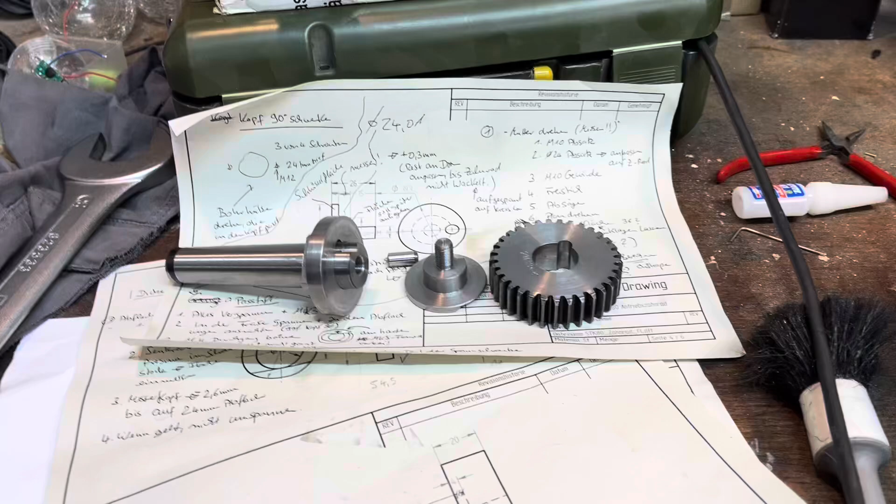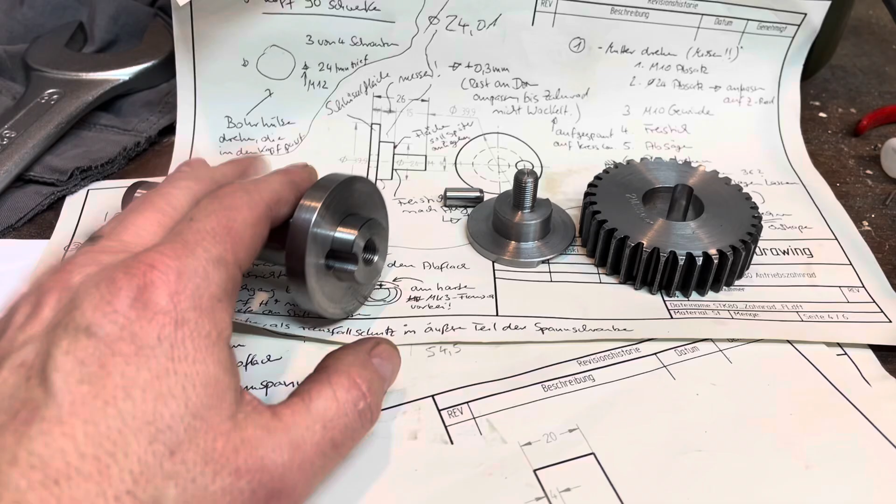All right, we're looking at the drive gear and the shaft of a slotting head for a Steinel SH4. So this piece there. I bought the slotting head without the drive dog here, or the drive gear.

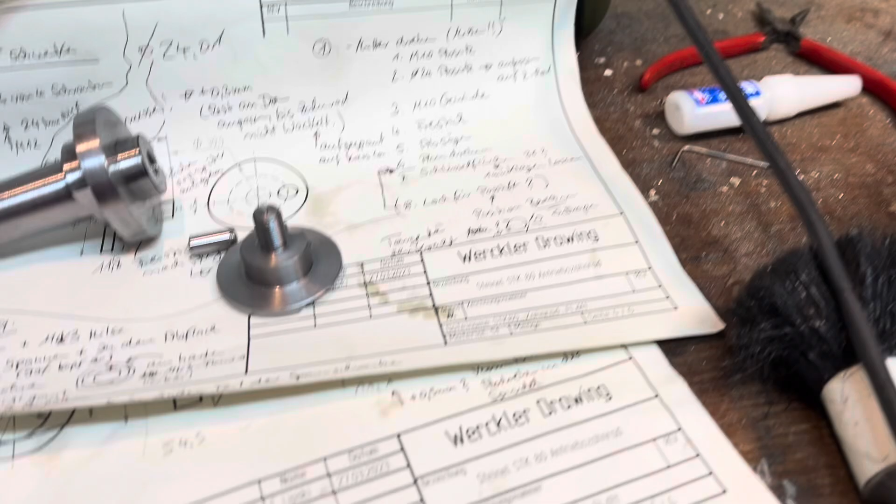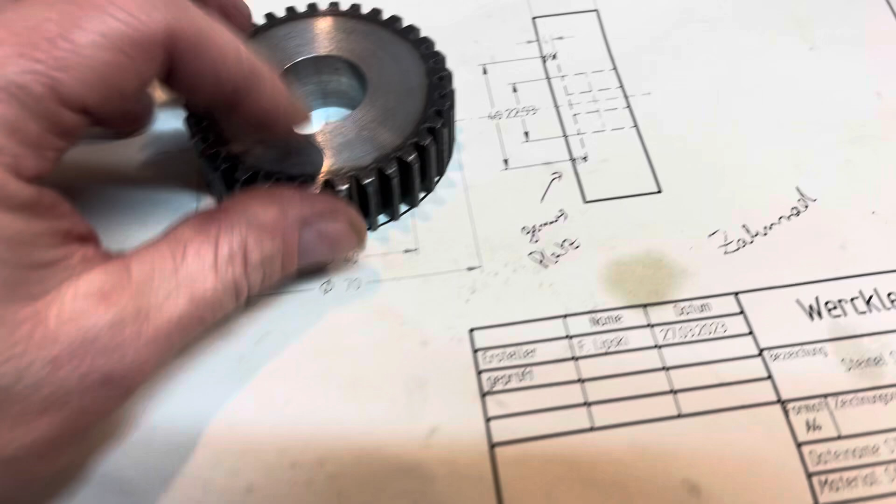It turns out that other than for the vertical head, this here is a standard gear that is, let me see, I guess, module 2 and, I don't know, diameter 70, so you can easily find out. That is a standard gear. There it is. 33. Module 2, 33. This I bought. The original is 18. This is 20, but it doesn't matter.

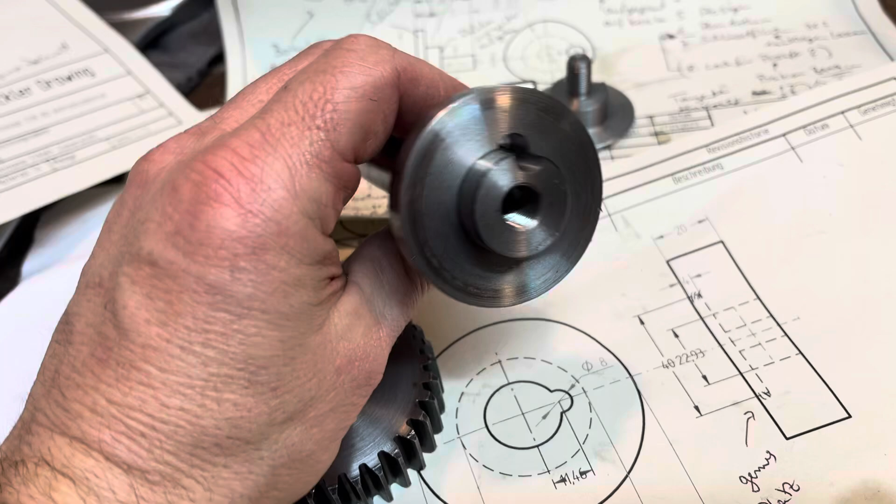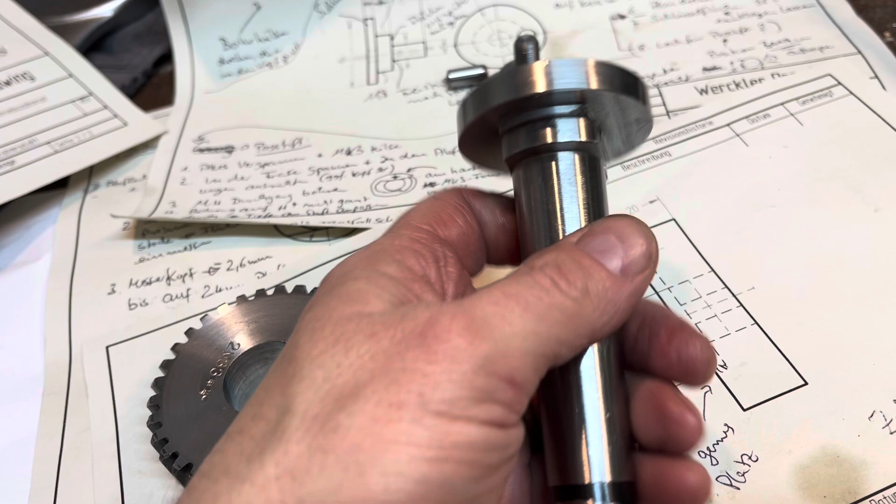The question was how to build an arbor and also how to make the connection between the gear and the shaft without a slotting head. So what I did is I bought a standard MK3 shank and I milled off these flats here with a carbide end mill. Then I turned this disc here that sits on here, which is then just glued on for further working on it in the shop.

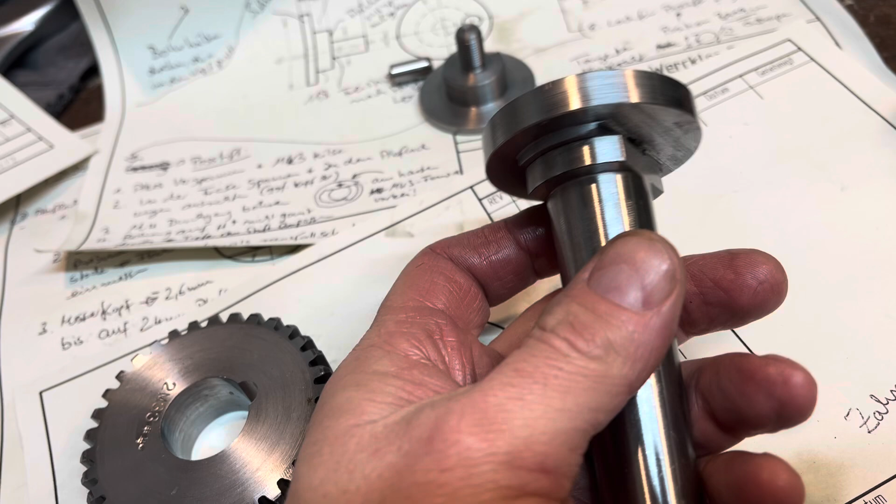Unfortunately, the first time I glued it not so good, so the attempt to also mill off the small flats here to have enough room to go into the spindle worked not so well, so it looks ugly, but it still works. What I then did is I built a nut like this. At the beginning it didn't have this hole in there, and this nut screws in here and forms a more or less continuous shaft to give rigidity to the whole thing.

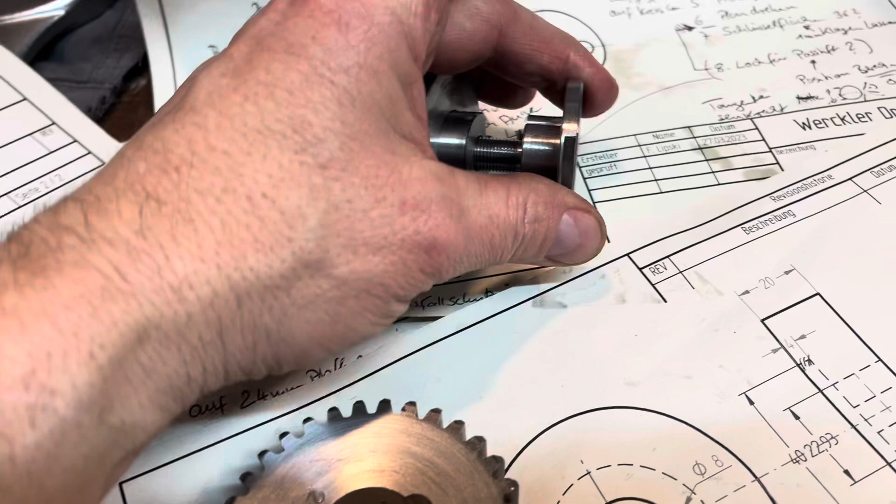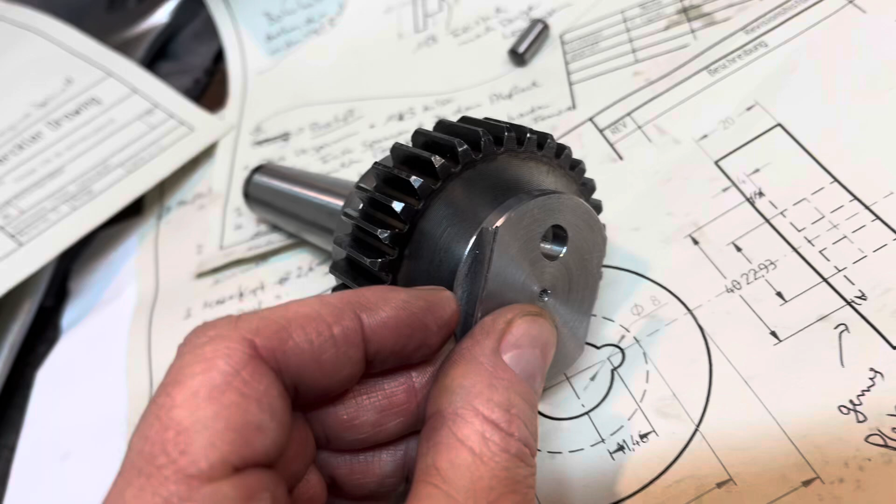And there are two flats here that also went not perfectly this time. Nevertheless, it's a 36 key that you can put on there. And then I screwed it all together and put it into my mill. And I put a little wire here in between the nut and the face, so that I can screw it tight, but at the end, after having drilled the hole, the nut would turn another half turn. It's an M10 x 1 thread here, so 1 turn means 1 millimeter, and I had a ½ millimeter wire in between here.

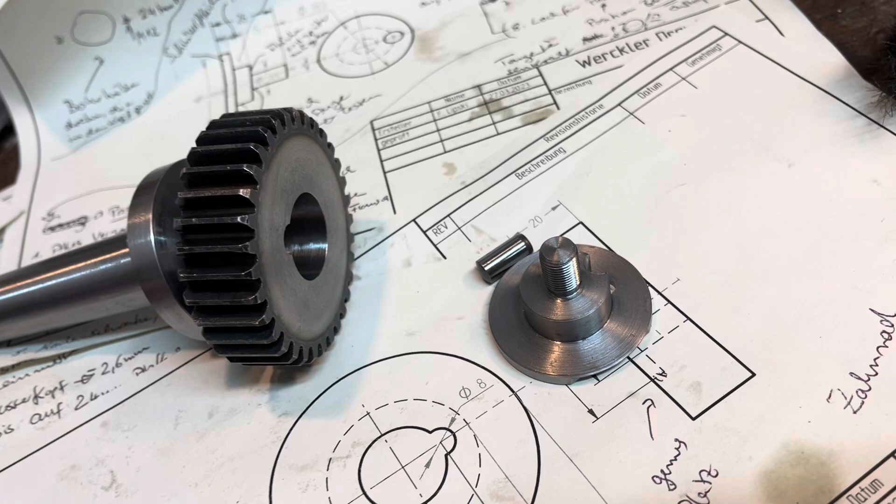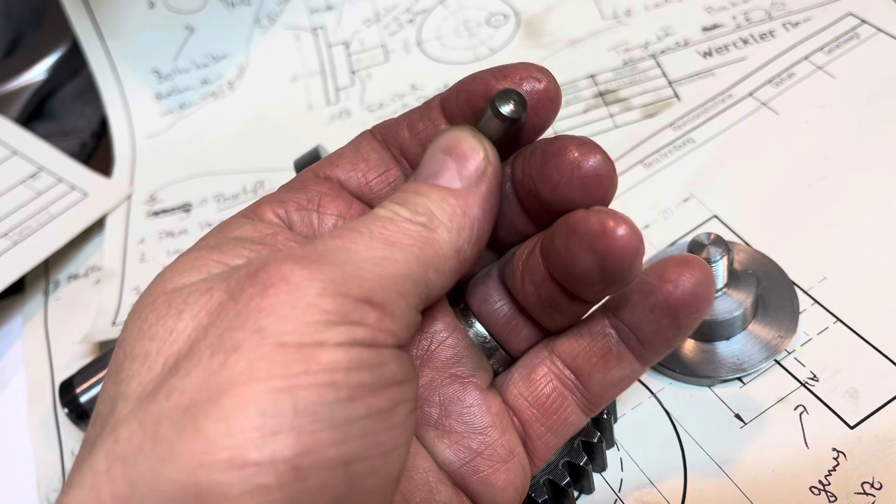And then I drilled the hole, reamed it so that an 8 millimeter dowel pin can fit in here. And yes, I know the bearing surface is not a lot. It is this small piece here, but on the other hand, this is really a huge pin. And if I do not believe in it, I can still put some screws through here, but I doubt that this will be a problem, because I am using this Steinel here. You see the mill.

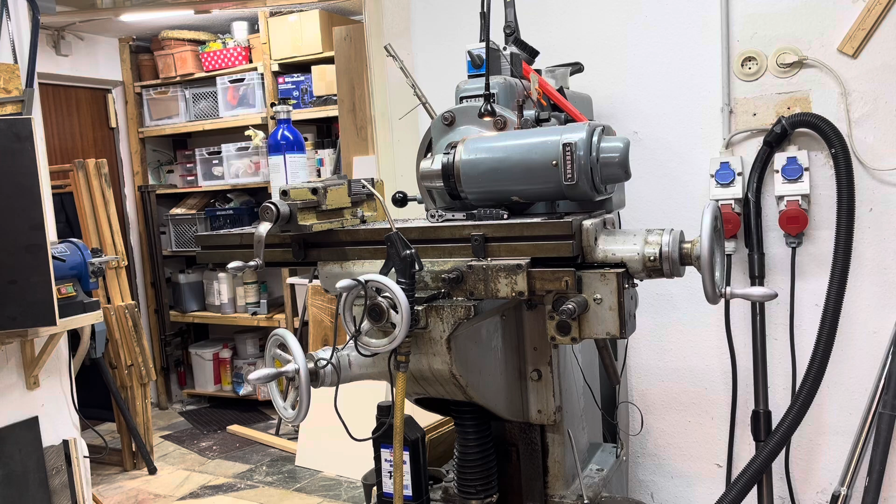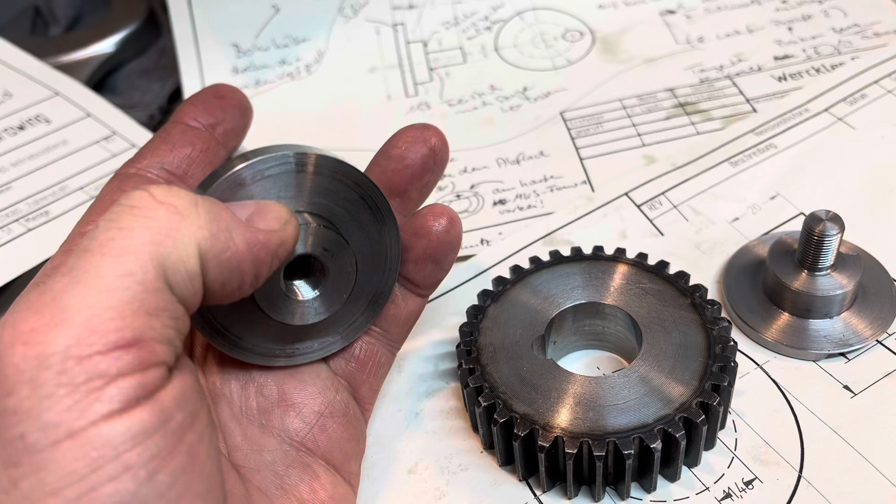That was the setup how I drilled the hole, because there was not enough clearance. Z clearance is usually a problem with these mills. And I am not using it nearly to the amount it was built for. So the load that will be on this gear and on this dowel pin that serves as the connection between the gear and the shaft will be maybe 10 to 15% of what they are designed for in industrial use. So

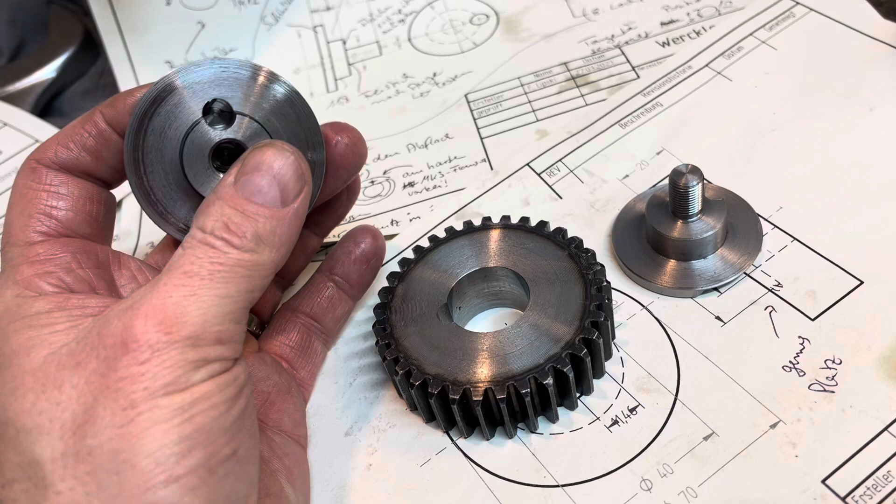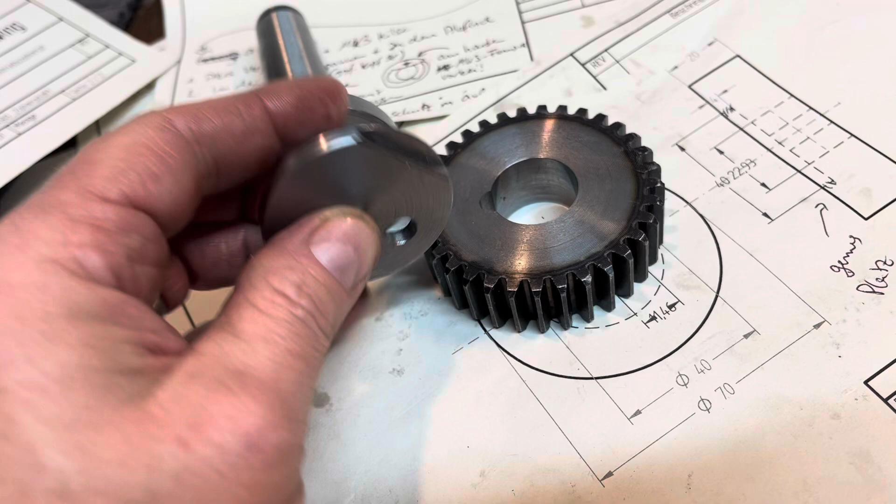I think it's fine. Because this is an assembly that usually you will not take apart much, I will put in the pin, and the pin drops all in, and then you just have the hole here for nothing. You don't need it anymore. It was just for the sake of having full material to drill into, so that the drill bit would not wander off. And then you put the dowel pin in, and you lock it in place, because the nut turns about half a turn further and does not allow the pin to drop out. Yeah, that is my project of the day here.

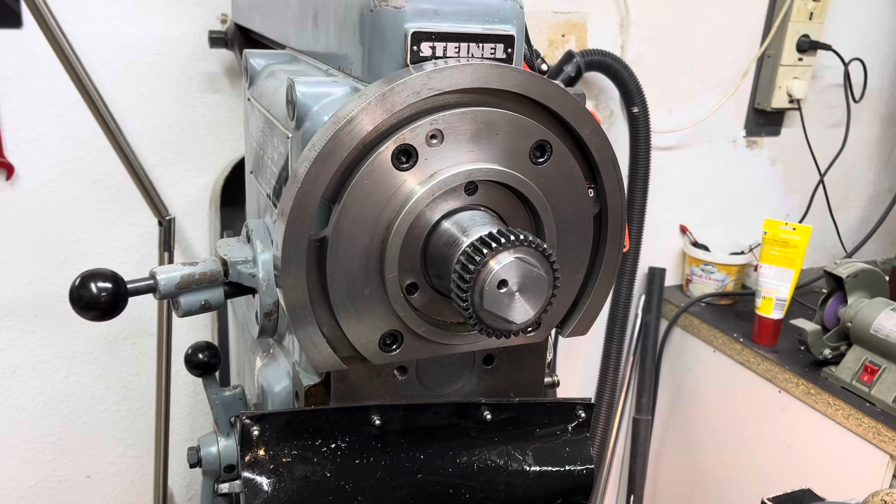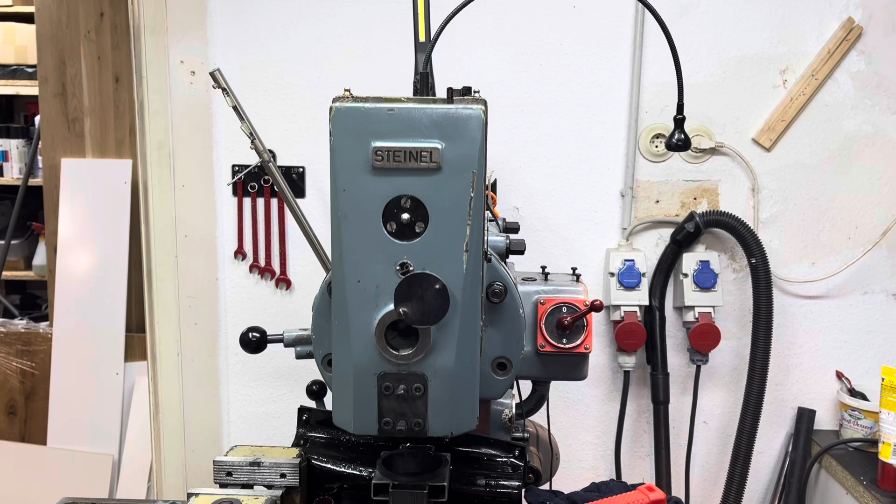Well, as you can imagine, I had to try the slotting head on the mill. This is the gear. It mounts good. Let's try to put the slotting head on. It's a little lighter than the vertical head. This is why I built this thing for the vertical head, especially to mount it. Let's see if the slotting head is simpler to mount. Okay, it works. The gear is working silently. The machine is not running quick.

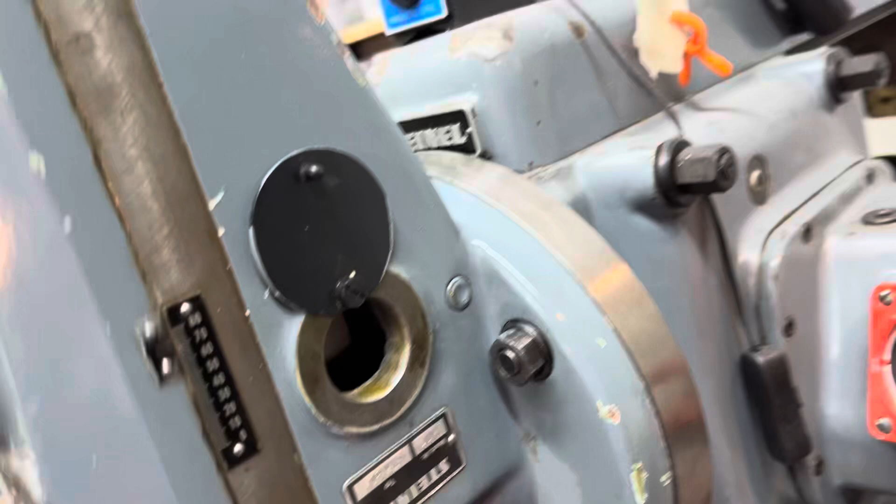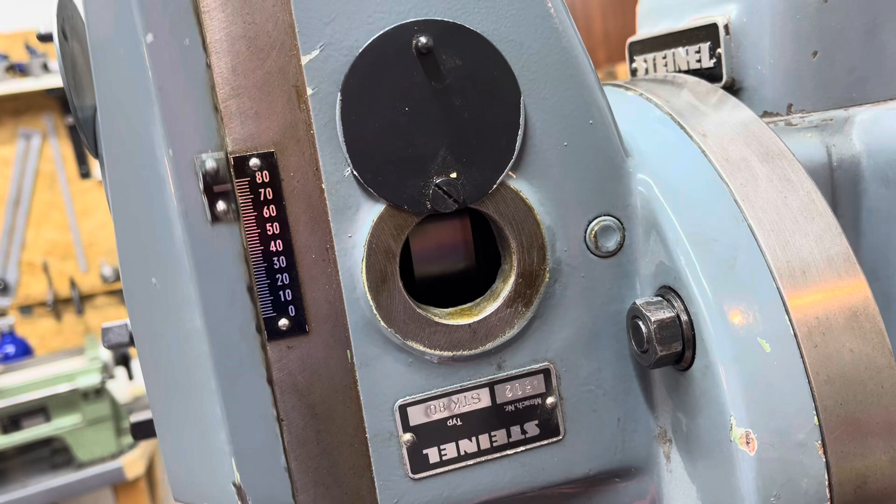What I discovered is how you actually adjust the stroke. You go in from here with the 19 wrench. You have to turn the spindle so that it aligns with the nut that is in there, and you loosen it a little bit. Then you go in here from the side. You turn it by hand, bringing the stroke down to 0, and then you have access to the screw, which is the same as the drawbar, 10 millimeter square, and then you can adjust the stroke, retighten this thing again, and run your slotting head.

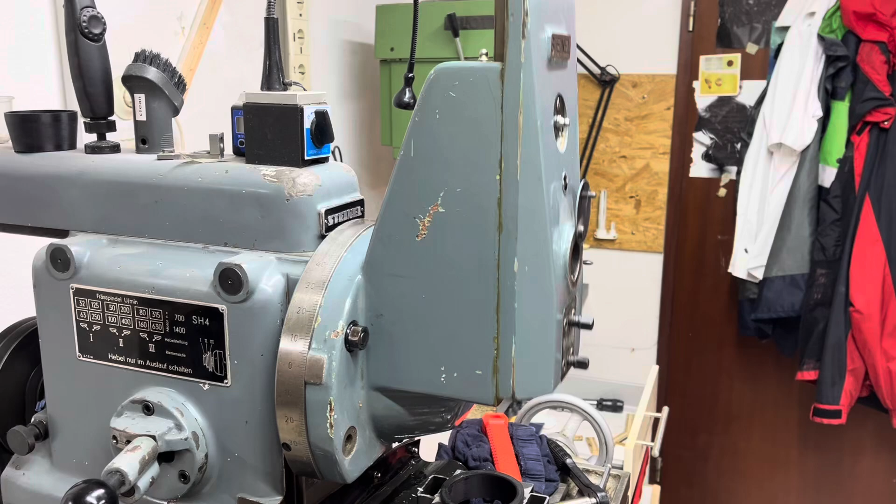It's the first time I see it in action, so I'm pretty excited. I have to think about some projects that I will do with this, but for sure there's a key that I have to build with this thing. So pretty cool.